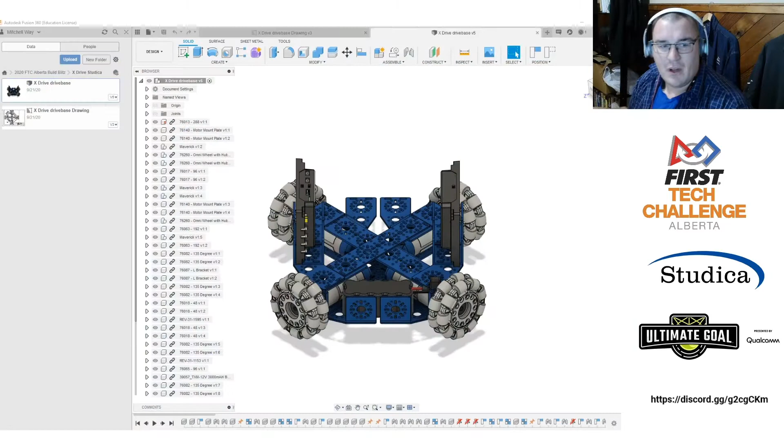The goal is to take something in CAD, and I'll hop over to my screen here in Fusion, and take something like this. Now I got the Studica kits, you saw me unboxing them and looking through some of the parts available, and I decided to put something like this together. My goal was an X drive.

I really shot high on this one. We'll do another video in the next few days about a more basic drive, something a rookie team could do, but perhaps you're more of an established team who might look at something like this. The goal was to create this in Fusion, turn it into a blueprint that could be communicated to a team member, passed along with the kit, and have them actually do the build, actually put this thing together, which is really what we were going for. To a degree, we've succeeded.

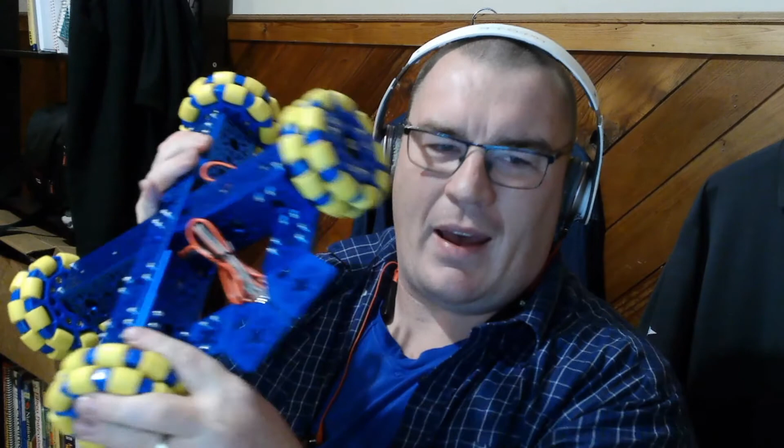I'm going to hop my screen to full size. This is the actual CAD, and I'm going to post the CAD of me building this start to finish somewhere at the end of this video, at 8x speed, so everybody can watch.

If you want to work on pieces of this and build something similar, be my guest. The purpose of this, though, was never to actually do the X drive per se. It was to figure out how we could communicate this design strategy to my build team. My build team is a couple of my students who I passed this off to, and they actually did the build based off some blueprints.

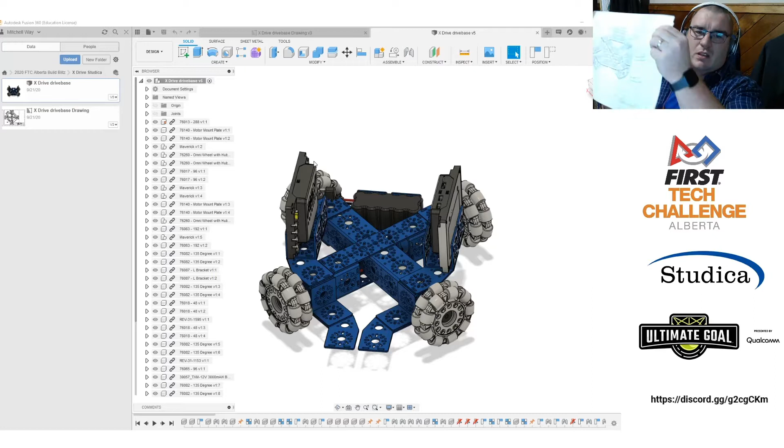Those blueprints are actually right here. You can see we printed these on some nice large paper to make an actual drawing of what we could do. I'm going to show you those blueprints in PDF form so you can see them nicely on the screen, and then I'll show you how to make those blueprints, because that's really what this is all about - the ability to take your CAD model that you built as the design team and take it to your team in a form they can use.

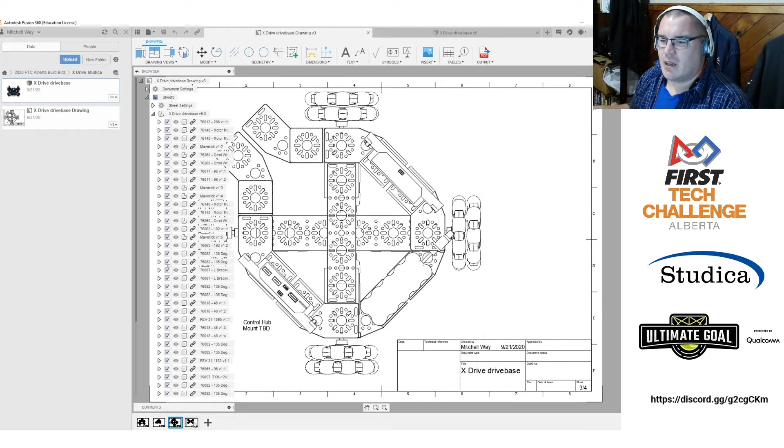So without further ado, here's a picture of the actual drawings themselves, and we had 4 different drawings. I started off with a basic - I'm just going to close down my browser so you can see it all - started here with a very basic X drive drawing, okay?

This simply showed where all the parts were going to go. You'll notice that some of the parts, such as the REV hubs and those pieces, didn't actually get put on. I'll explain that in a minute, because that's part of your design process as well.

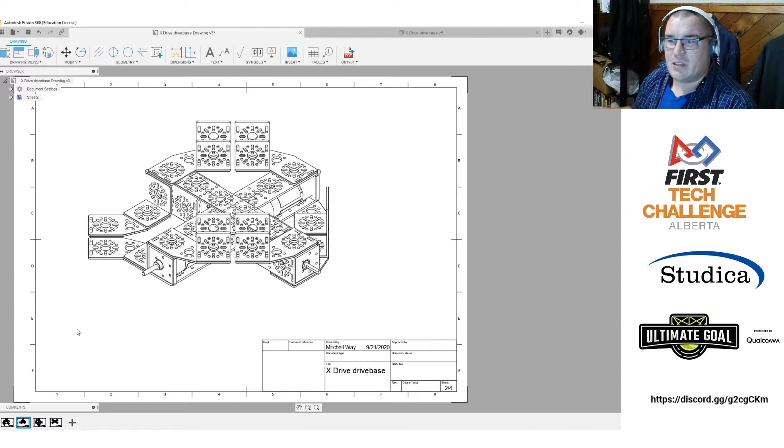Okay, we can see one here. This is actually just the structural component, just the superstructure, and I figured our students would need that piece because they need to assemble this first, and the wheels tend to obstruct the view on a lot of things if you look at them here.

As well, I gave them a top-down view so they could see how everything lined up. This turned out to be rather important, so they knew which pieces went where. Finally, I gave them a piece that was kind of the first steps - just the drive rails themselves, minus any of the attaching bits. Again, this proved to be important.

Now, you'll notice that when I got these drawings back, I actually got them back with a whole bunch of comments on them. You can see they've scratched comments on here because we learned a couple things about this design in the course of building it.

This is where often this piece of engineering goes. I, as the designer, go design something. The build team or prototyping team or testing team actually goes out and tries it out, sends it back to me and realizes, hey, some of the stuff didn't work.

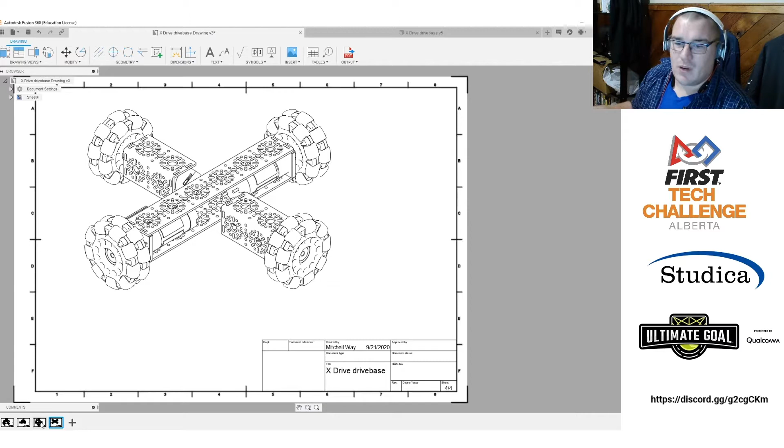Now, the things that didn't work in this drivetrain specifically, if we look at this piece of flat right here, this was actually in my CAD library for these particular parts, but we didn't actually have that part. So in my notes, they've written on the drawing that they replaced this with a longer version, I believe a 192, to go the whole way across the robot.

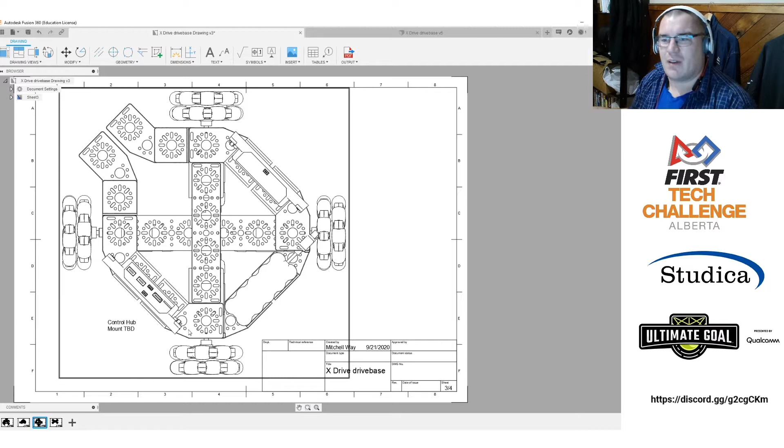Also, they realized that we didn't have enough of these angle brackets, the 135-degree angle pieces, to attach the REV hubs. They basically noted that in your design you're going to have to get rid of those, find some other way to do it, or we're going to have to order more parts, because we all know that happens in a build.

Now let's talk about how to make these drawings. I've got my X drive open here, and this is your first step: open up your CAD model, whatever it happens to be. From here, you go up to your File menu, pull down New Drawing, and New Drawing from Design.

In this case, I put something together on nice A2 paper, something a bit bigger. If you want to do this in inches to find your paper size, it'll keep it in millimeters—we could change your document settings. Anyway, let's go for design, move the thing up to A2, and work with that.

We're going to create this from the full assembly. We could make pieces of this invisible before we make our drawing if we want—that can sometimes be helpful—but I'm actually going to show you how to do that in the drawing, which sometimes can be even more useful.

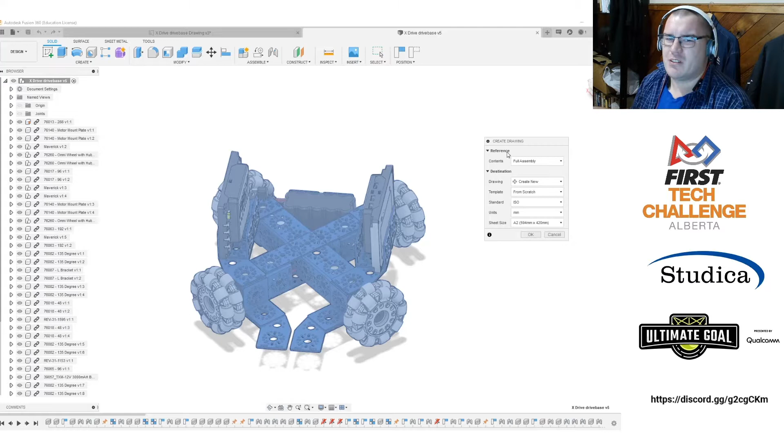We're going to create a brand new drawing and go from there. It's going to tell us that some of our bodies and things won't quite show up properly. That's okay—we brought these over from step files, so that's inevitable. Now, I'm going to be filling air in a couple places, trying to talk over the time my computer spends loading, because this step can take a little bit of time.

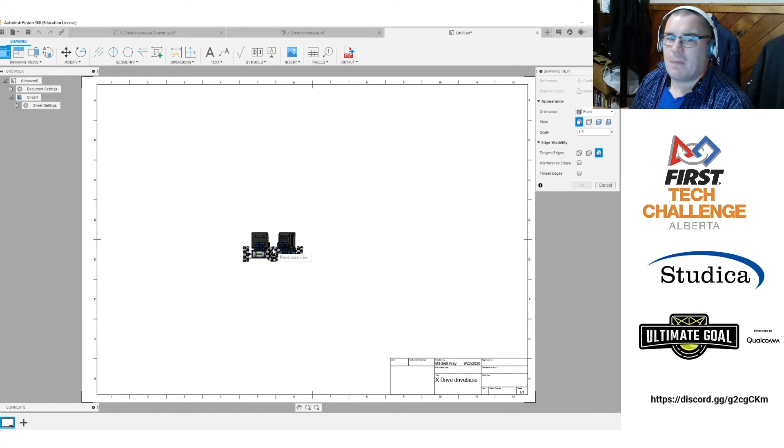Now, once I've gotten here, you'll notice I've got a base view of my robot from the front view floating around, and a drawing view window, which is what I really want to focus on right now. Because on this piece of paper, the scale is not great—you can see this robot takes up hardly any of the page.

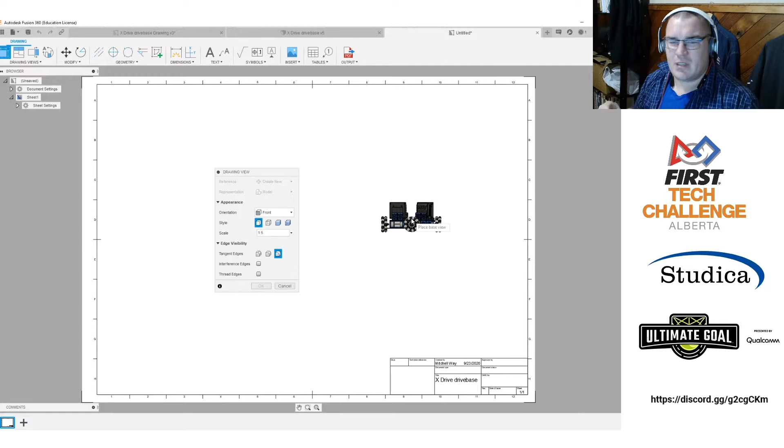In this case, I wanted to use as many pages as I could. I like using more paper space when trying to communicate, because if I'm the build team, I want as many pictures, as many drawings, as many options as I can for my drawing. So I'm going to use more pages, and we'll show how to do that in a second.

So I'm actually going to cut my scale down to 1 to 2. I might even go 1 to 1.5 here. What do we think? That's not bad.

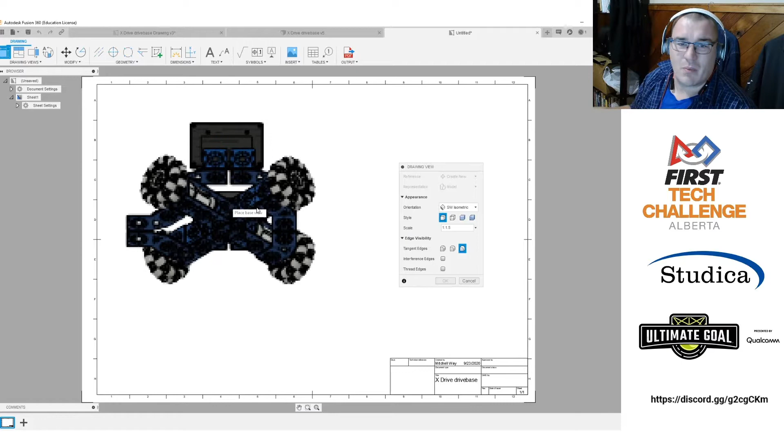Now, right now this view is talking about a few different things, but specifically its orientation is front. Usually for my first drawing or first design, I like to do it isometric, and there are options here like southeast—this will show the bottom of the robot—or southwest, or northwest. In this particular design, I really like the southwest view. I might even make this 1 to 1.

This paper is actually large enough because this robot was approximately that size. So let's press here, left click, right click, and that's going to bring up your menu for what you want to do. I'm just going to press OK. Now, this is going to take a second to load.

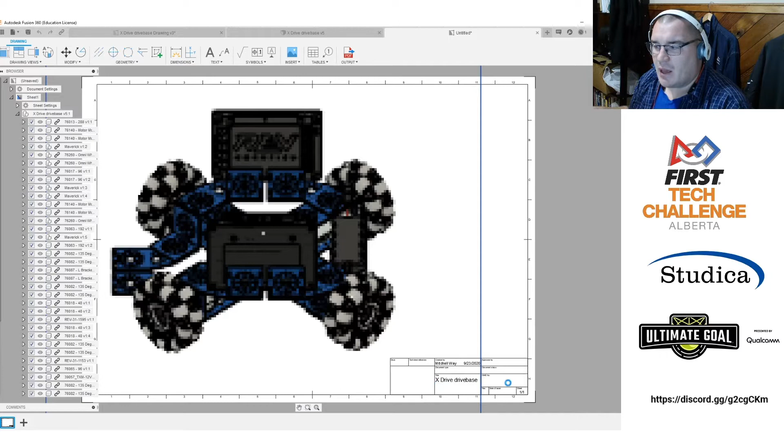This is where we're actually going to put the main drawing of our robot together. There's a few other options here, but you'll notice that some of the details, like the file's name, sheet number, and my name as the designer, have all been ported automatically onto this piece of paper so that I can get my drawing of what I want.

This is obviously a really good overview of the robot so that my team can start looking at this, and I would actually start here. Now, the next thing I'm going to do, because I like this as a first page, a few other things I sometimes do on this is throw on some text here to describe things.

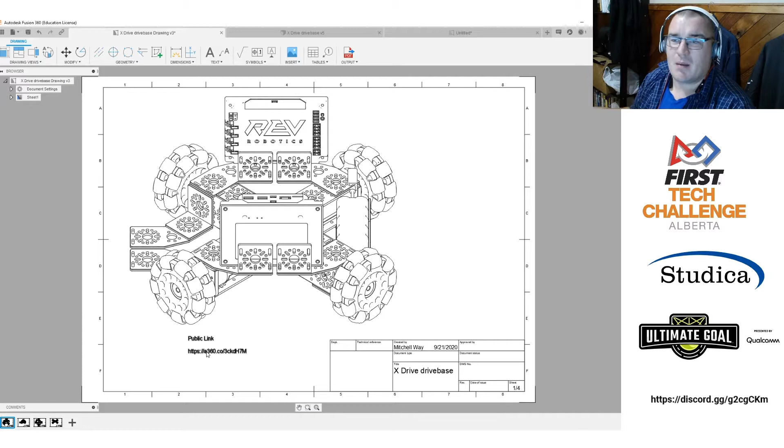One of my most common texts, and you'll see I did this here, I actually created a public link for Fusion 360. If anybody's done a public link before, once you go to your actual drawing, this is a really good way to share designs amongst your team.

Right-click on your design and go to Share Public Link. When you do this, you're going to get a little window, and you're going to have to check off this box that's right here that says share the latest version.

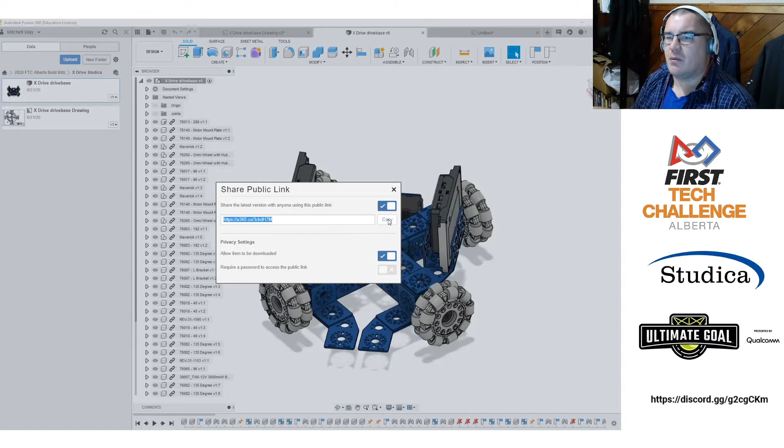I'm going to grab the link here. I'm just going to copy it with this button here, and I'm quickly going to jump over to a Google Chrome window and just plug that into Chrome.

When you do this, you can send that link to all of your team members, and it's so easy because this will open in Chrome, it'll open on your phone, it'll open on any device you want, and it'll actually show the 3D view, and even better, the exploded view of this.

So let's talk about what that actual public view does. Now you notice that I've got access to the full drawing. It's in 3D, in a very scaled down CAD program in my browser. Fantastic. Again, this works on your phone.

So if you want to send this design to somebody else on your build team and say, hey, what do you think of this? This is a great way to share those designs.

Now, I got a few options, and I've used this. Any of you who are part of the CAD challenges in the spring know that sometimes we use these to actually measure things to say, hey, your robot's more than 18 inches long, that's no good. In this case, you're probably going to find, if I measured this right, that this robot, all told, side to side, is a little less than 15 inches across.

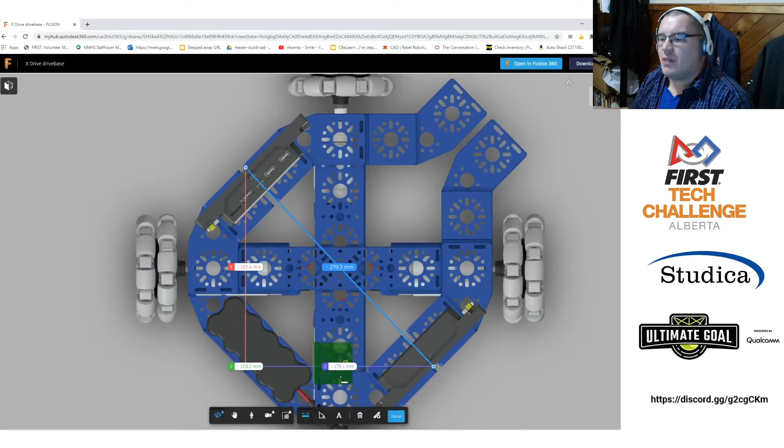I'm just going to grab rev hub to rev hub, but you can see we've got 279 millimeters, and I believe that is far less than our inches. Here we go, let's turn this to inches. Fractional inches—there we go, about 11 inches across.

So this is actually a really small robot, all told, for FTC, but we tested it in the sizing tool today. It definitely fits with some space to spare, so we can add some stuff to it.

I digress. One of the cool pieces about this, as you're sending it and communicating with your team, this is actually not a bad view if your build team has access to a computer right there as they're building, because they can actually use the explode menu to pull apart pieces of this design.

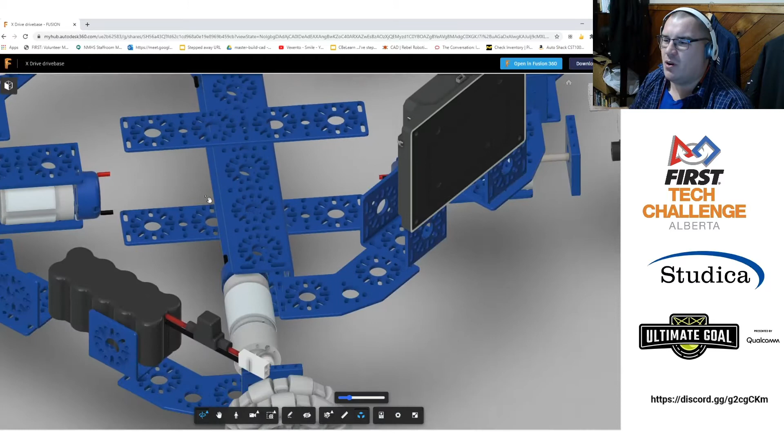But what you can see here is that you can see where all of the pieces are actually going to go. And if I, as a build team member, want to just follow how these pieces go together, I can absolutely do that.

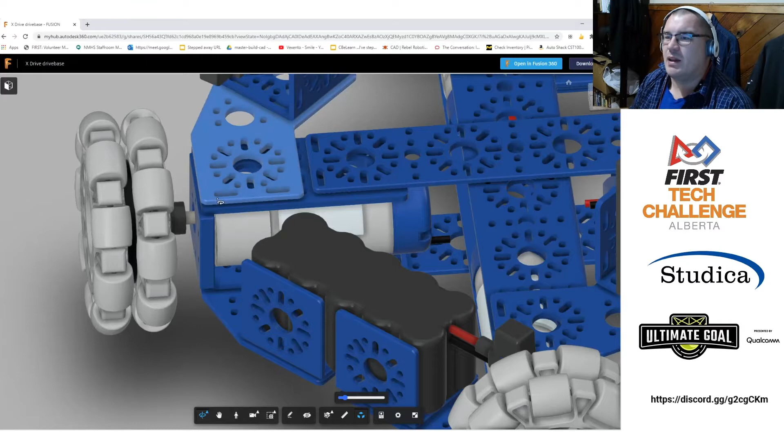And you'll notice that when we were attaching these, that was one of the other notes we got. We actually had no really good way of attaching multiple layers of these pieces together. This part here specifically had to be 3 layers, and it just didn't work. We didn't have the right bolts for it.

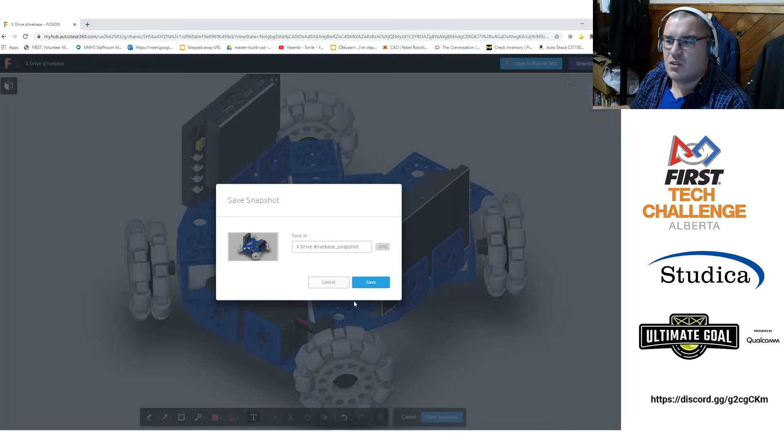That communication is key. It's possible as well, if your team wants to, they could use the markup menu here. This is going to allow them to say, okay, at that point I had too many layers for 12mm bolts, need to order longer. That's an example of something your build team might throw on here, and then they can save a snapshot of it, which downloads as a PNG file, and you just send it to them and say, hey, I got a snapshot of this with some notes on it, some stuff that's gone wrong. We've got line tools, freehand, lots of options here.

Anyways, I digress. This is a really good way of communicating, but the easiest way often is to create these drawings. So we're going to go back to our drawings.

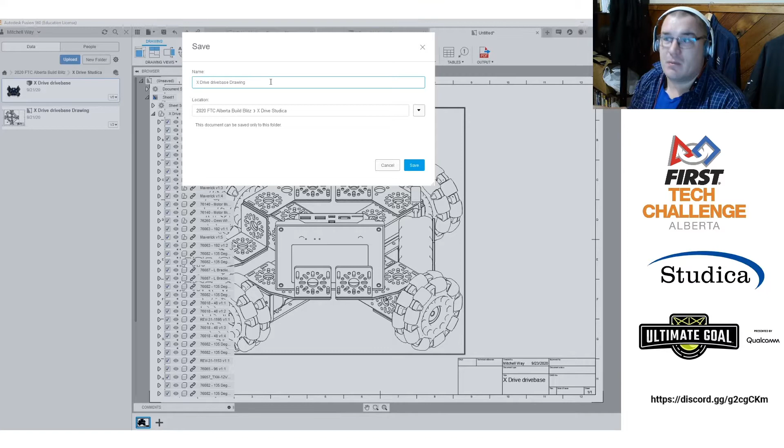Now I'm going to save my drawings. I'll tell you to learn my lesson, because I actually made this full set of drawings once after many, many minutes of loading, and I had Fusion crash on me on my computer. It didn't save - it doesn't auto-save the drawings quite as well, especially if they're not named. So naming them, not a bad idea. I'm just going to call this drawing 2, because I already have a drawing number 1.

Let's save this thing. Now, you notice in this particular drawing that I've actually got a browser over here. This won't show up when I export this as a PDF, but what this is going to do is show me all the parts that are involved in this particular drawing.

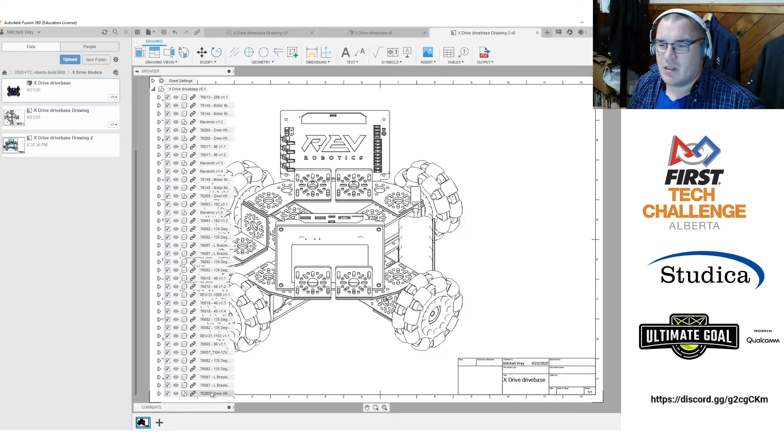If I want one of them to go away, like let's say in this drawing, this control hub that's nearest to me is one that I probably want to disappear so we can see the rest of the robot. I'm just going to scroll through here, find out where it is, and click the eye button here, and I can make it go away - make it invisible for the sake of this drawing. You're going to see it take a second to load, but there we go. There's my new drawing, sans that part I didn't necessarily need.

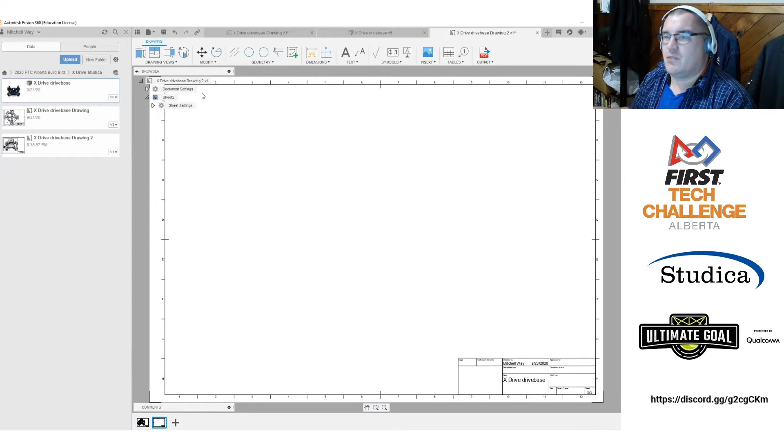And this goes for all of the drawings too. I can keep drawing base views on this and keep choosing what I want to do with them. So in this case, maybe I want a top view at a 1:1 scale. We just measured this and found out it's 11 inches across from side to side, so on this 11 by 17 paper, this might just fit, actually, oddly. Let's go see - let's press OK and let's see what we get. I think it'll just fit.

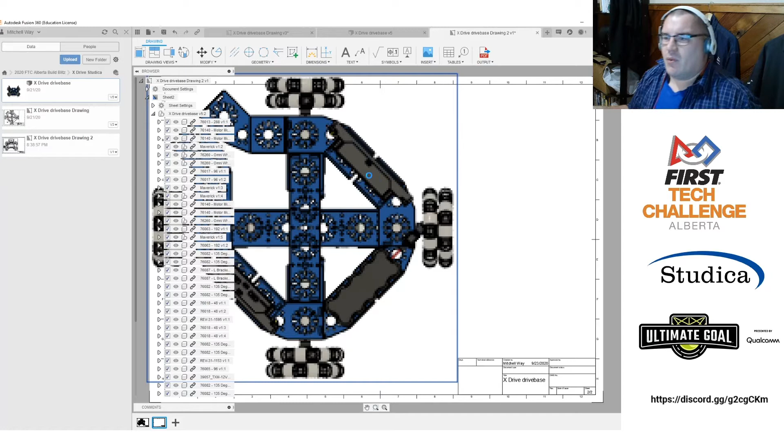Anyways, this is again that top-down view that you saw before. And again, if I decide for my top-down view that I maybe don't want my battery on here, maybe don't want to show the hub so people can just see the structural pieces, I can absolutely do that by just making things invisible over here. In this case, I got pretty close - this drawing is just about the right size to do that.

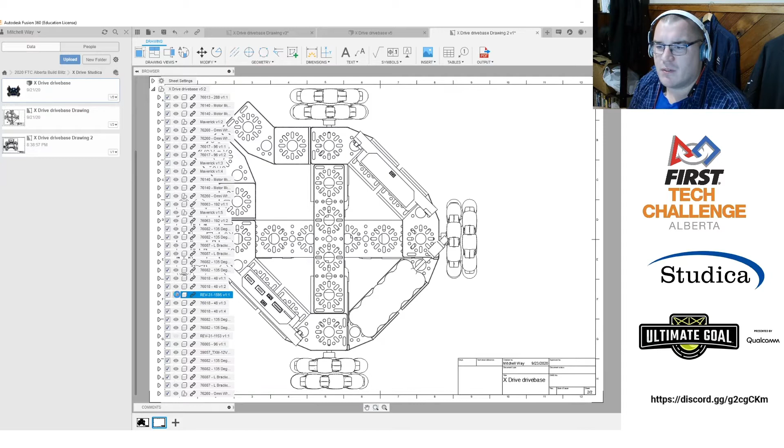And again, like let's say I want to just show the superstructure. I go through here, and I take my REV hubs, I turn this off, and what you're going to see is those parts are just going to disappear from your drawing. You don't need to communicate those, because that's what this is right here - this is you communicating your designs from your design team to your build team.

This could potentially make it so that disparate parts of your team - let's say you have to go self-isolate at some point during this year, it's happening to students all across this province, maybe you have to go self-isolate - you can still be a part of your robotics team even though you physically can't be in the room, and that's a big piece of this. Anyways, we got a top view.

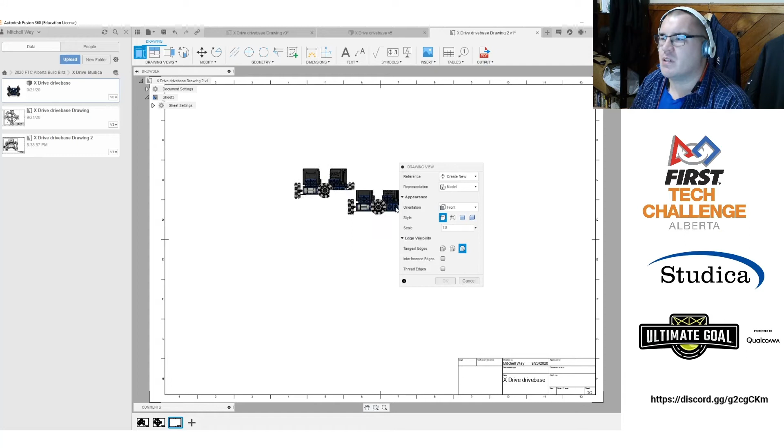I'm going to show you one more cool view that I like, and I teach it in class because I think it's super cool. We can actually do orthographic views of this too. So if we want to do a side view, I'll do this at a 1:5 scale since I know it'll fit on this piece of paper, and we can show all the elevations of this piece of work by pressing OK.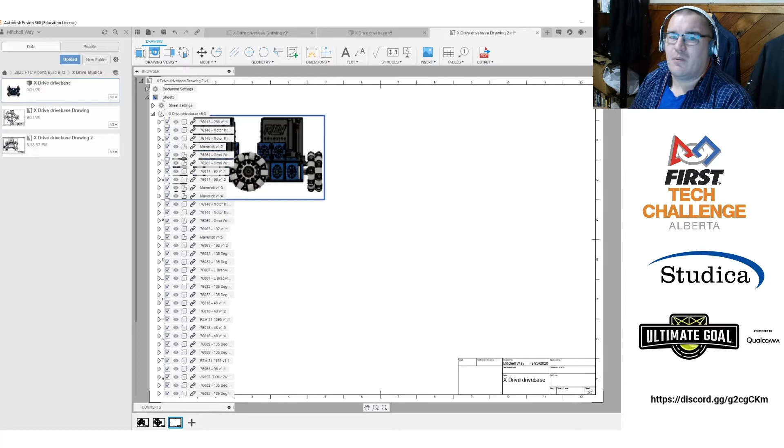We're actually going to use the projection view here. I'm going to show you two more tools that may become handy as you go through, and we'll talk about those. Specifically, we could talk about section views, and we're going to talk about detail view.

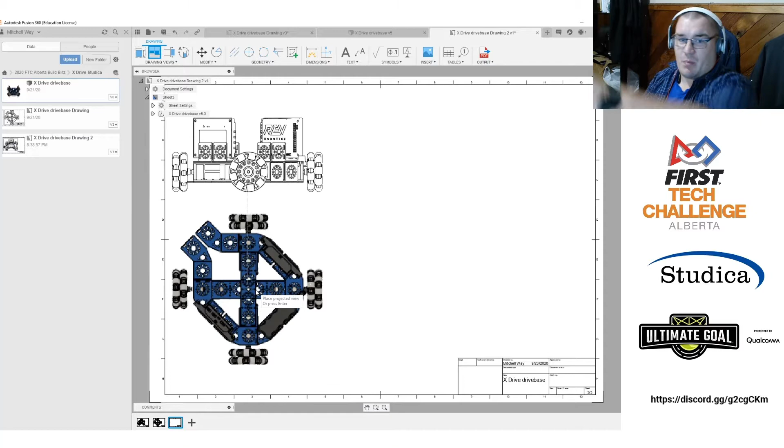I'm just going to reduce my browser here to show that we've got the side of this robot. We have an option to do something in a projected view, and that's going to allow us to take this model and show an orthographic projection. This means everything lines up at 90-degree angles, and we can see the top, and potentially the side - those are left clicks I just did - and then we can also show an isometric view down here.

When I right click and press OK, it's going to take a second to load, but it will drop all 3 of these views into this particular drawing. Those views are going to be linked back to this original drawing, so if I want to make any pieces invisible, I can do it on all 3.

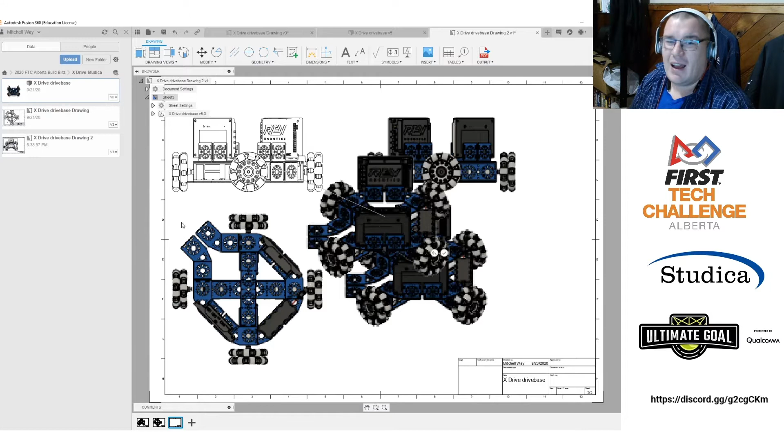There's also a way to go in and do it on just one of them if that makes you particularly happy. But this is the way to actually design these things, because you can send these PDFs really easily and lightly to your design or build team, have them print them off and do their build based on these with very little technology involved at that point. They then scratch them up, put all the notes on them as to what worked and what didn't, and send them back to you, and you might have to recad some of this stuff. It'll make you really good at the design piece of any robot build.

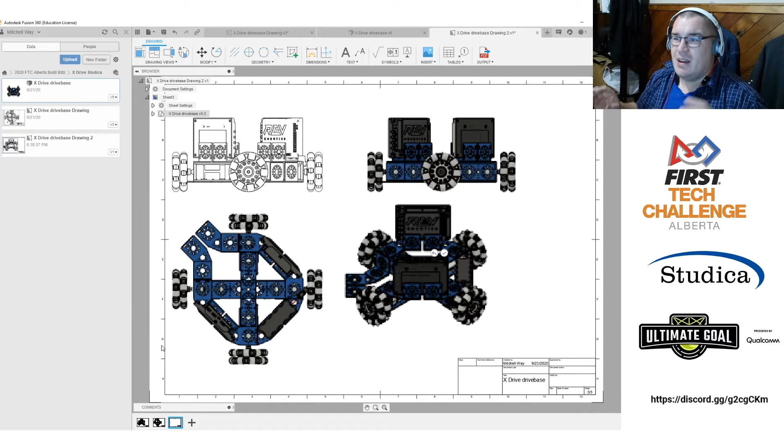Now, again, the purpose behind this is to make sure you have designs that you can send to your build team, and to make sure your team understands what's going on with the robot. It also looks really cool when it comes down to your engineering design journal.

Here we go, we've got loading, that's good. I do want to change one more thing on this, because this isometric view - I actually want to show specifically what the colors are and what the shading is, just in case there's any ambiguity left here. To do that, I'm going to double click on it, left click, and get this menu again, which is going to give me some options.

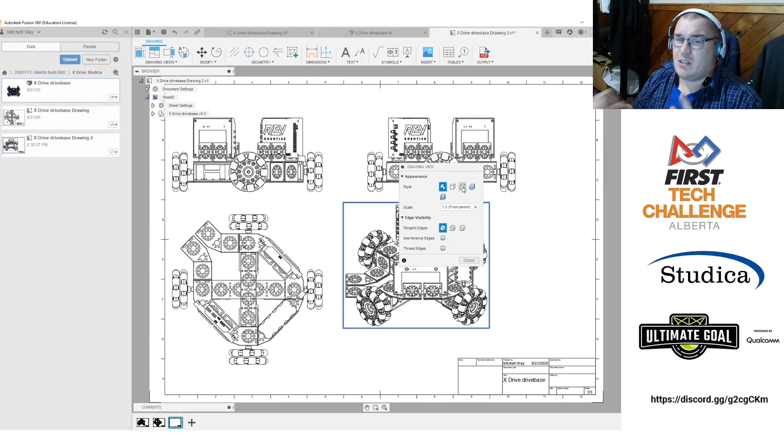In some cases, I might want to do hidden lines, and if I do that, it's going to show every hidden line that's behind another line. In an FTC robot, that can get kind of messy, so I really just want to do shaded view here. This is going to take a second, but it's actually going to shade in the pieces of this robot to make it match the actual CAD model. If I've applied any appearances anywhere in here, this is a good place to look at them and see how they actually work. With that being said, this is a really good way to communicate.

All right, I think I got it. There we go - we have a nice color 3D model there, and it's going to give us the visible edges and color it in.

Great way to communicate this, because if I'm a build team member and I see this series of drawings, I have a very good chance of putting this together to the specifications that the design team wanted. This gets more people involved with your team and potentially could make a team run in the COVID era that otherwise may not. You may be in a place where you only have one person building and the rest of the team wants to be involved in the design. Maybe that person's going to build, someone else is going to program, someone else is going to drive. It's a good way to do it in some cases.

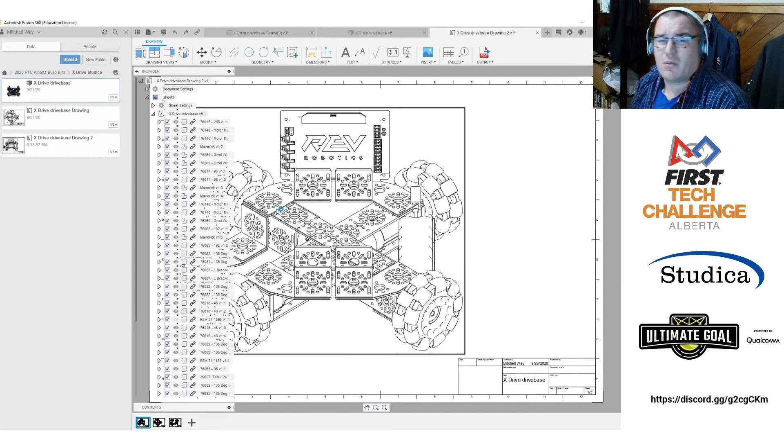Finally, when you're all said and done and you've got all your drawings put together, you hit save and go to output, telling Fusion that you want to output either all sheets, current sheets, or selected sheet, whatever you want. I like all sheets. At this point it's going to save your actual drawing as a PDF. I'm just going to throw this on the desktop, and I checked off the button that says Open PDF. So as soon as it's exported the actual drawings, it's going to pop them up as a PDF, and I'll show you what they look like before you send them to your team, before you send them to your build team, before you print them off to show your mentors so they can score them up with a marker. We love doing that, that's fantastic for actually putting stuff together.

Now let me throw this here. There we go. We have some nice PDF views of all of these parts of the robot that can be sent to the printer, run off, and sent to your build team.

Easy as that. The last thing you may need, the last skill I'm going to go through before we're done, is you may need to put a detail view on something. Let's say I have a particular piece of this robot - actually let's go with the second piece. I'm going to give a detail view specifically of this joint on the wheel. Nothing specific, but you may have something like this in your robot that's somewhat small but really important.

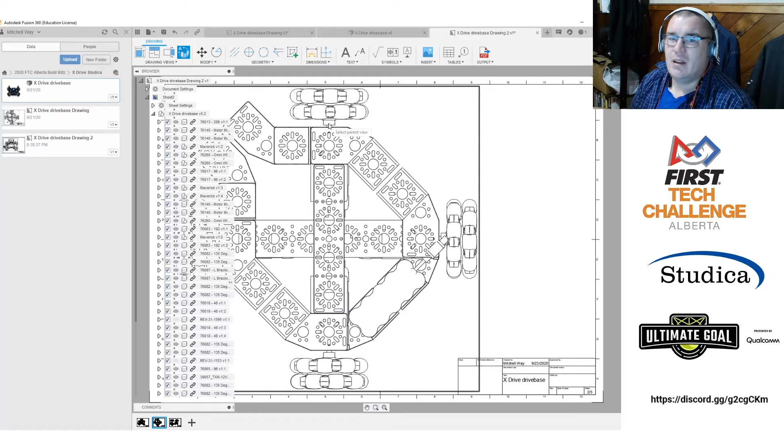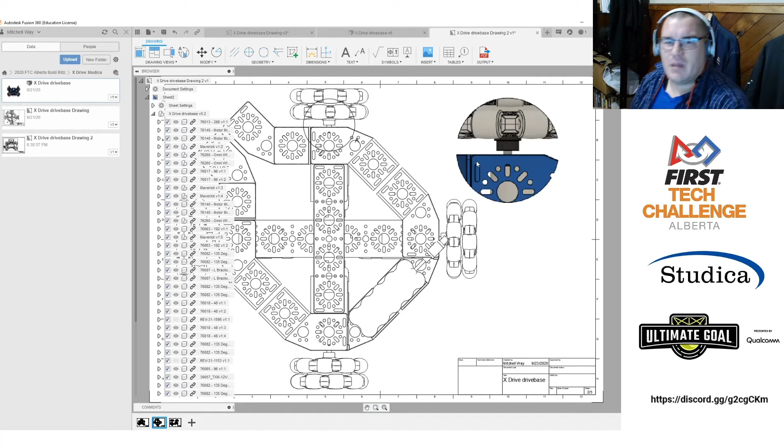So in this case, I'm going to open up this detail view by clicking once and dragging a circle out, and that circle is going to allow me to create section A, or detail A. It's going to label it, and it's going to let me put this elsewhere on my drawing. I can left click, right click, and press OK, and what's going to happen is it's going to show that individual piece of detail specific to that. It's going to blow it up, and I can actually make the scale significantly higher. Let's say I want to make this at a 4:1 scale - I can blow this up so it takes up a significant portion of the page. In this case I'm going to go 3:1, and I'll make it color.

And that's going to last. Emma, I'm recording, I'm recording. Thank you - you can say hello, though.

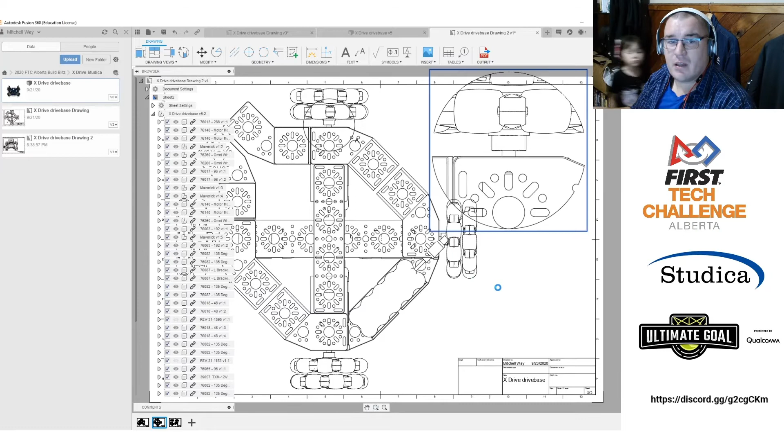Hello, Emma. Anyways, here's your detail view, and you can see that it shows up with the circle here as to where the detail is, and the letter A. That letter A can be moved if it's in an inopportune place, which ours is. Then we take our section view or detail view here - this wouldn't pass my class by any means, but we can see that it overlaps here. We can see that this is section A, at a 3:1 scale, whereas the rest of the thing is at a different scale. That being said, this is a way to actually communicate things with your team.

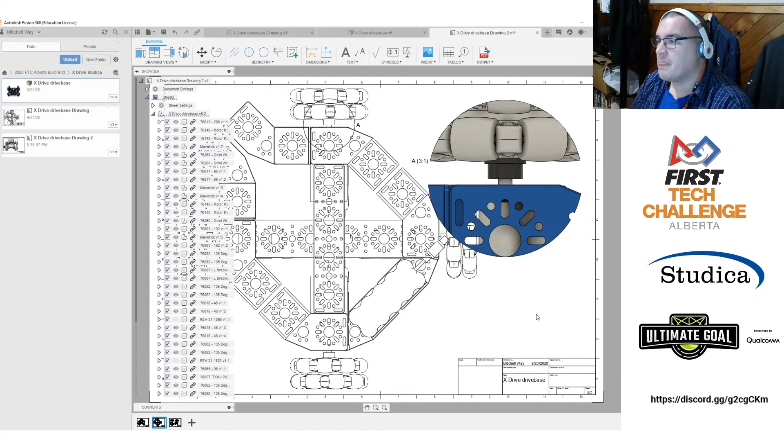Without further ado, I'm going to show the full CAD at very fast speed here of the robot actually coming together, and hopefully we can get you a different drive base in the next little bit, and maybe some shooting mechanisms to test out. Cheers!